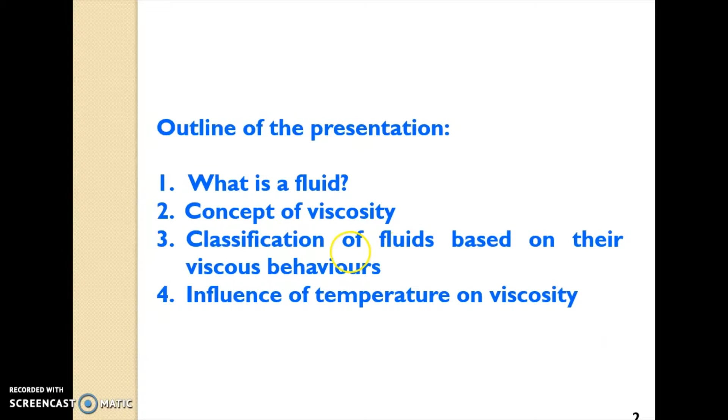Now, what is a fluid? In terms of a layman, one can define a fluid as any substance that is capable of flowing. But if you want to go more specific, then the technical definition of fluid is that fluid is any substance that continues to deform as long as a shear stress is applied on it, however small it may be. Here, the word small is a keyword.

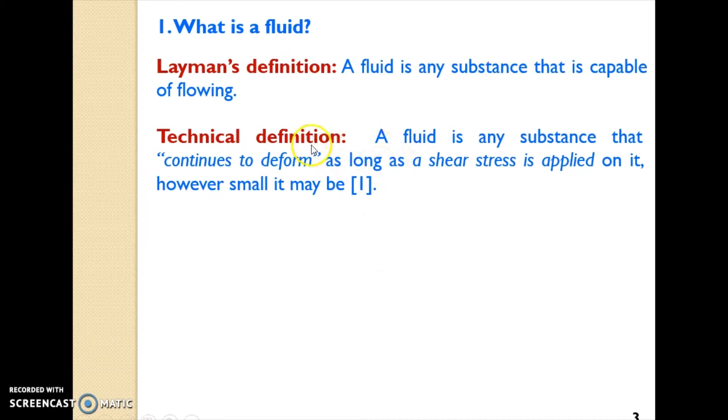To illustrate this point, we can focus on figure 1, where we have a flat surface shown with the hatched lines, over which there is a fluid having different layers. Now on the top surface, a shear stress is acting. As long as this stress acts, however small it may be, these layers will continue to move one above the other, and this continued movement, because of application of the shear stress, is a characteristic of any fluid.

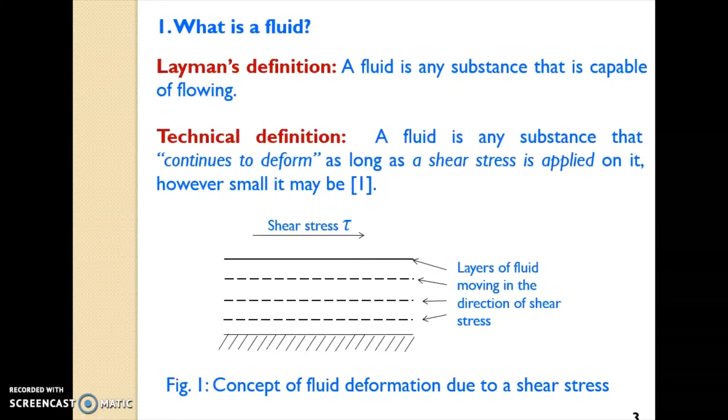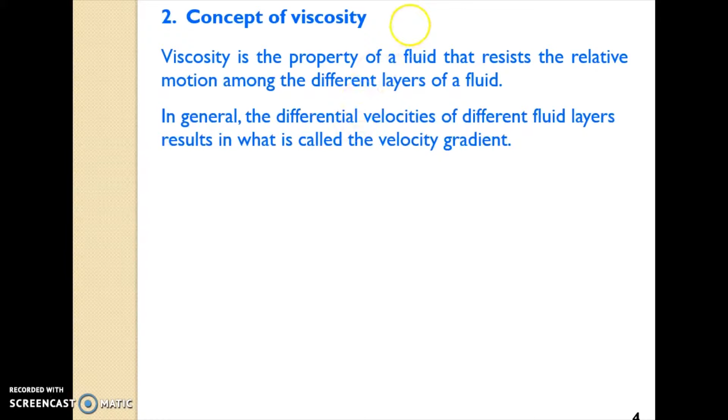Now, because we have realized that the fluid moves in layers, it will give rise to differential velocities across the different layers. Based on this, we can define a property called viscosity. Now, what is viscosity? It is the property of a fluid that resists the relative motion among the different layers of a fluid.

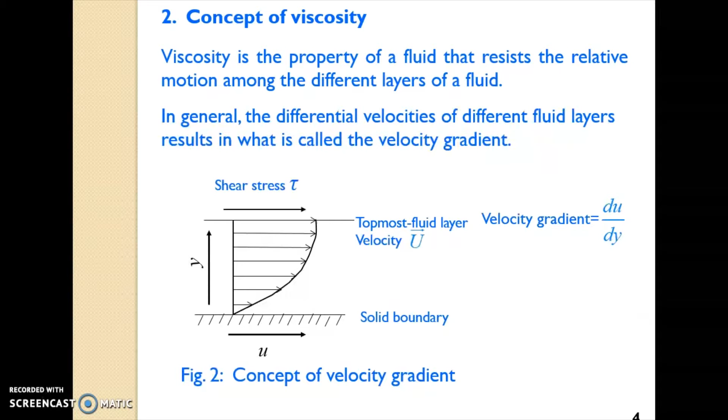Say again in figure 2, we have a solid surface. The fluid layers attached to the solid wall will have a velocity of 0 with reference to the wall, whereas the top layer will move at the velocity represented by the symbol capital U, and this velocity U is the velocity of the object that is creating a shear stress of tau. As a result, the different layers from the free surface till the solid boundary have different velocities, and the velocity gradient is defined as the rate of change of velocity per unit change in vertical height from the wall. This is mathematically expressed as velocity gradient equal to du/dy.

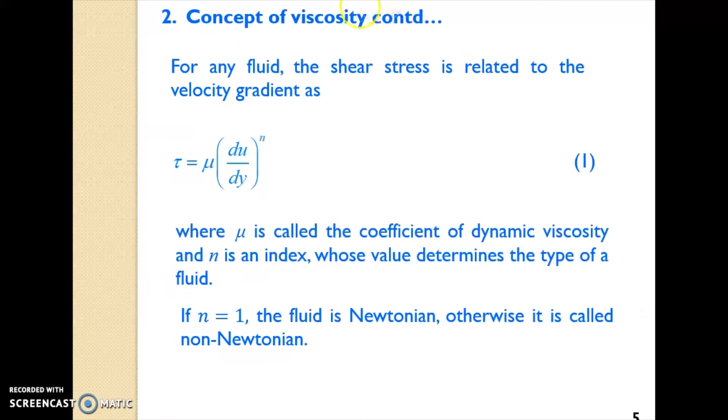Now, whenever there is a velocity gradient, there is a relation between the shear stress and the velocity gradient that is expressed by equation 1. Here, mu is called the coefficient of dynamic viscosity, and n is an index whose value determines the type of the fluid. As a special case, when n is equal to 1, the fluid is called Newtonian, otherwise it is called non-Newtonian.

Based on the motion of different fluid layers due to application of a shear stress, we can classify the fluids based on their behavior, called rheological behavior. The major classification is ideal fluid and real fluid. Ideal fluid, as the name suggests, will possess basically zero viscosity, and in that case there will be no shear stress created because the viscosity is 0. Whereas a real fluid will possess some finite amount of viscosity.

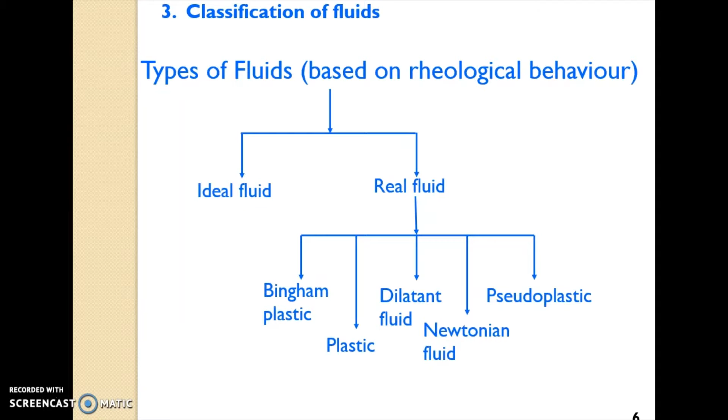A Bingham plastic is a substance which doesn't deform till some finite amount of shear stress is applied, and beyond that the fluid behaves like a Newtonian fluid. The best example is toothpaste. If we recollect, as we go on squeezing the tube, till some minimum squeezing pressure is applied the toothpaste doesn't come out, and beyond a certain squeezing pressure, the toothpaste flows out of the tube.

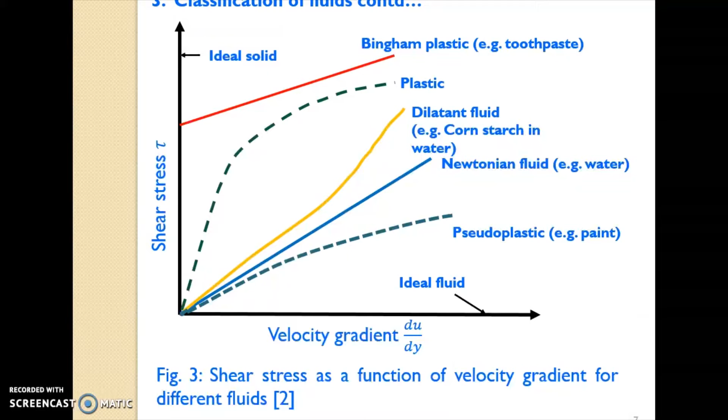Whereas in the case of a pseudoplastic or shear thinning fluid, with increased velocity gradient, the rate of increase of shear stress goes on decreasing, and in the case of a Newtonian fluid, the shear stress is directly proportional to the velocity gradient. These are all listed in this slide.

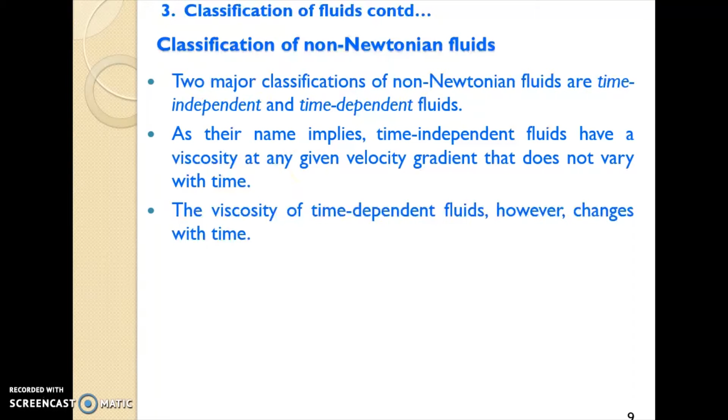Based on the time behavior of non-Newtonian fluids, they can be further classified into time-independent and time-dependent fluids. What is a time-independent fluid? At a particular velocity gradient, if the shear stress does not change with time, these are called time-independent fluids. Whereas there are many fluids where even though the velocity gradient remains constant, the shear stress may either increase or decrease with time, as shown in figure 4.

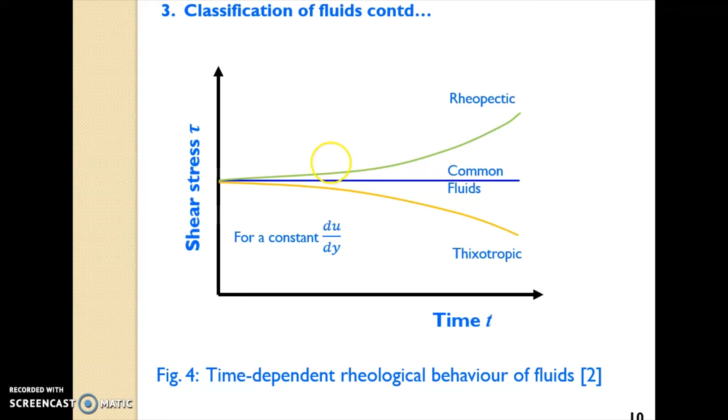In the upper graph shown with a green line, even though the velocity gradient du/dy remains constant, the shear stress increases with time. These fluids are called rheopectic fluids. Whereas in the case of a thixotropic fluid, the shear stress goes on decreasing with time at a constant velocity gradient. In these slides, we show different kinds of fluids, define them, and see different examples.

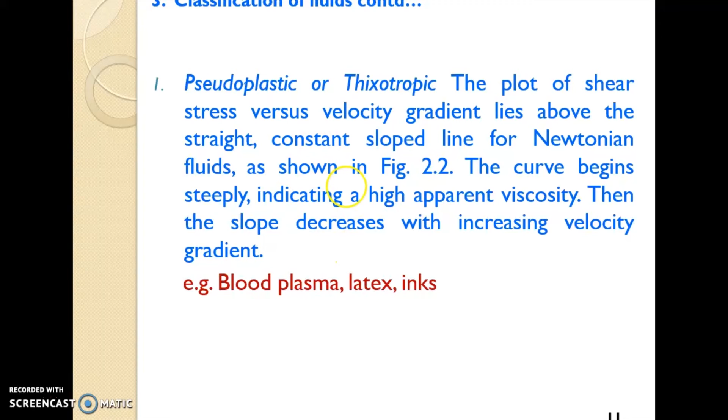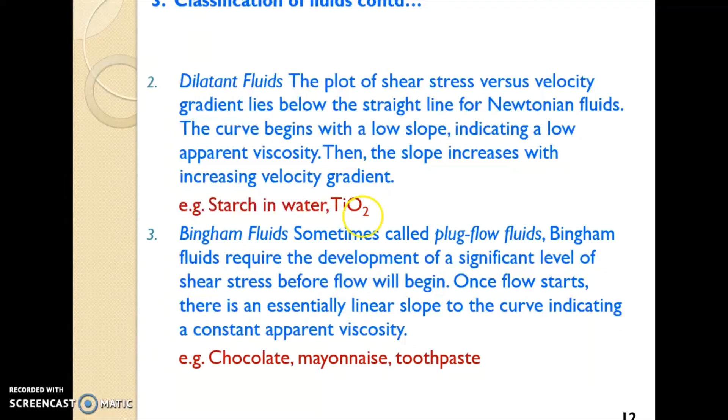Examples of thixotropic fluid are blood plasma or latex inks used for our ball pens. Dilatant fluids, already discussed, are starch solution in water or titanium oxide. Bingham fluids examples are chocolate, mayonnaise, toothpaste, etc.

Now, does viscosity have any relation with temperature? The answer is yes. However, the behavior of viscosity for a liquid and for a gas is different. This is because of the inherent mechanism of the development of viscosity in liquids and gases. In a liquid, viscosity is primarily because of intermolecular cohesive forces, whereas in a gas, viscosity is because of intermolecular collisions.